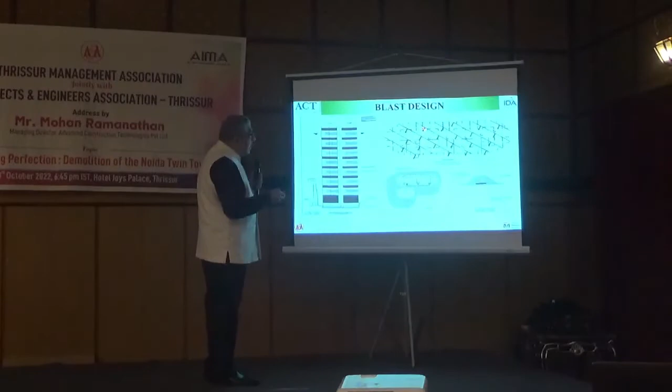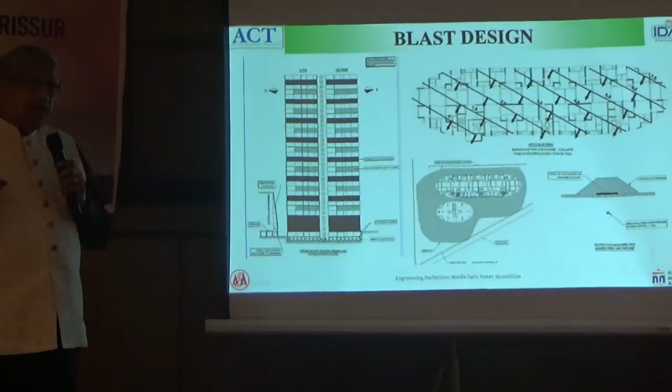I've given you one plan of one floor showing how we are pulling the building in this direction. This is zero, 1 second, 2 seconds, up to 7 seconds in the middle floor. In the top floor, the 9th second will be at the top. Then we have the landing zone. All this put together is calculated, and the dark lines here are the columns being charged. It gives a summary of how we are blasting in each floor in one direction, and in the upper floors it goes to the right at the top. It's complicated, but we had drawings for every floor showing the delays.

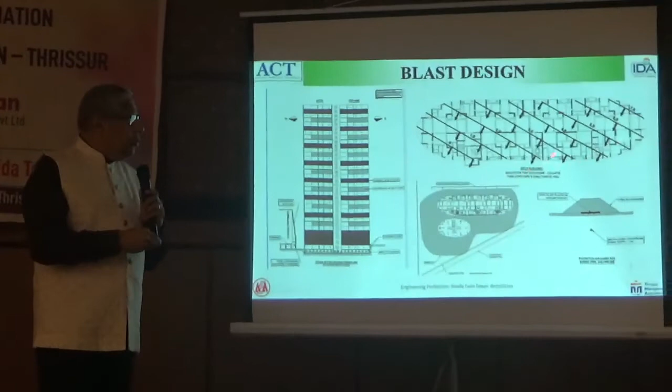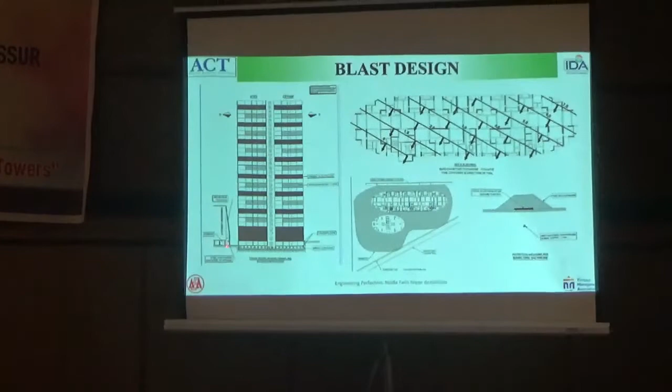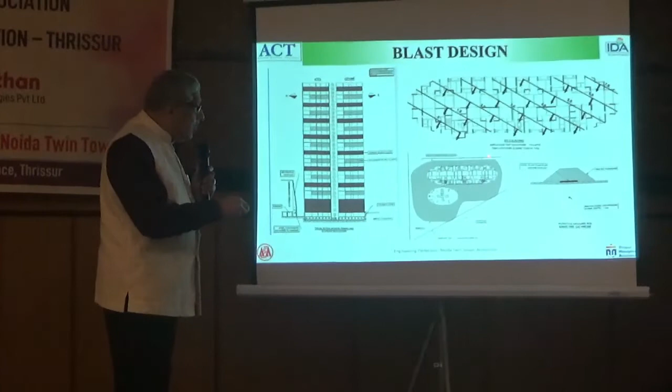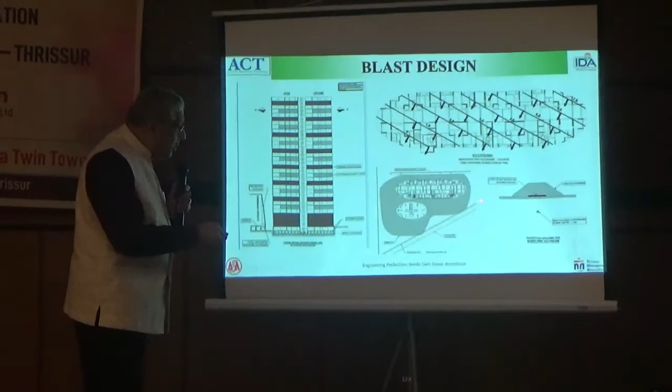And this is the 9-meter building which had to be protected. We had empty seagoing containers stacked up here and also draped. This shows the primary and secondary blasting floors. This shows the expected debris plan. What was planned was the entire debris must come within the boundary of the property. And this here, I know you can't read, is the GAIL pipeline.

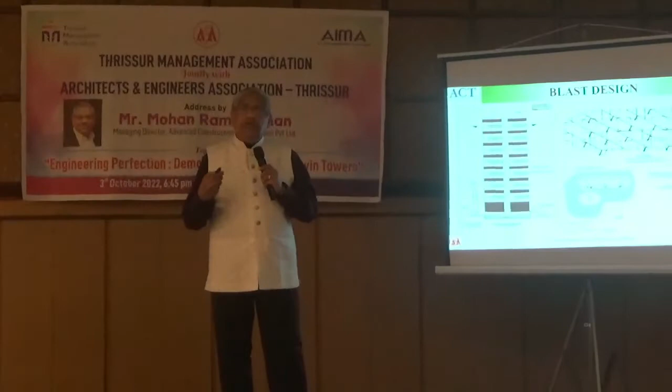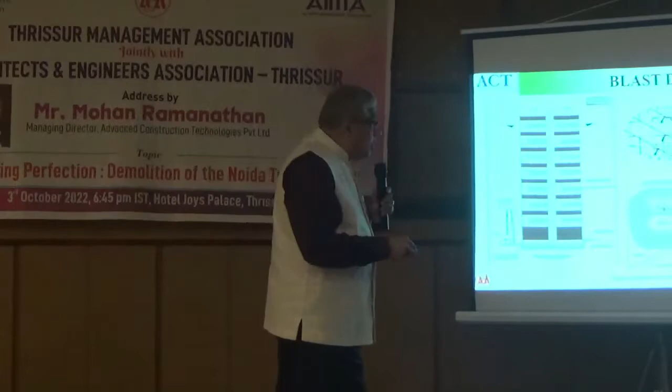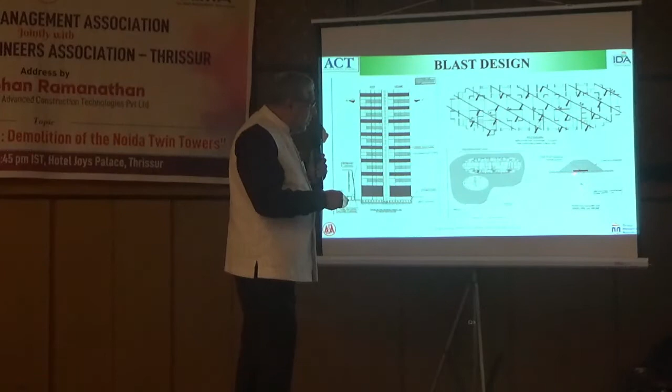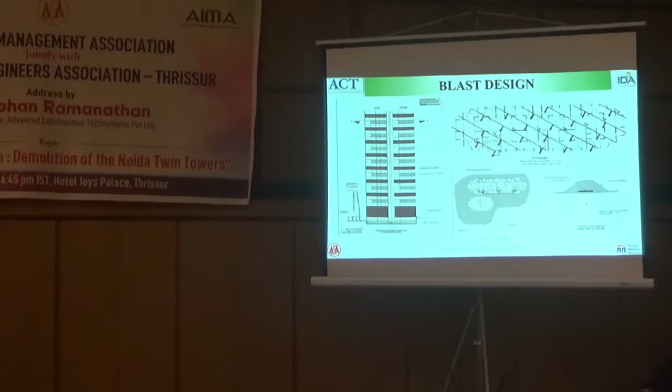And this was the way we protected it. All along we had a steel plate on top of the berm, on top of the pipeline here, and we had earth mounds on top of this to soften the blow if it falls. So every single risk was very thoroughly analyzed. Time is not enough to go through everything.

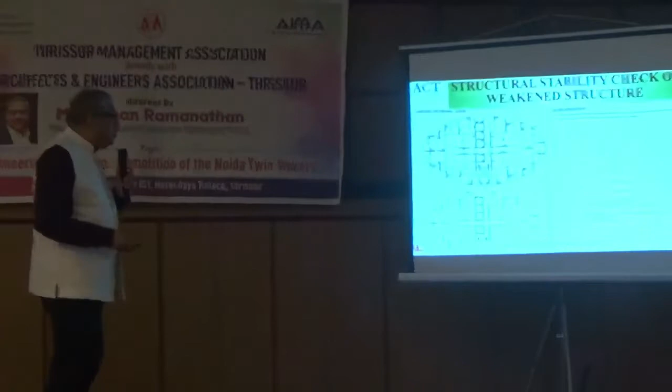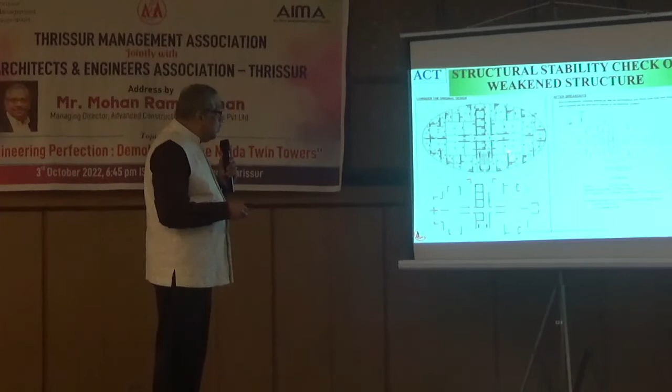And then we have to weaken the structure. We don't want anything to stop the fall when gravity takes over. So here you see which are the columns and which are the shear walls that have to be broken, and to what extent. The red ones show which are the ones to be broken. Suppose there is a shear wall of 4-5 meters, how much we remove.

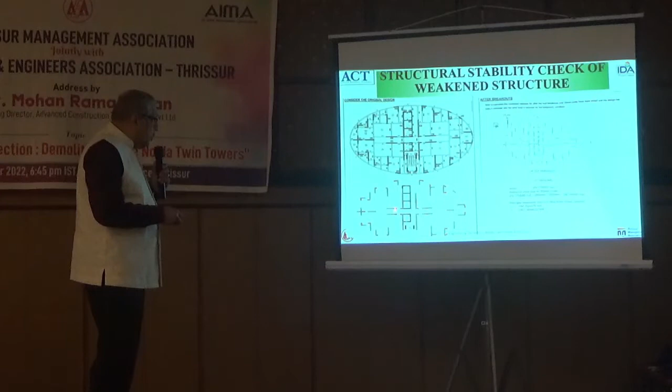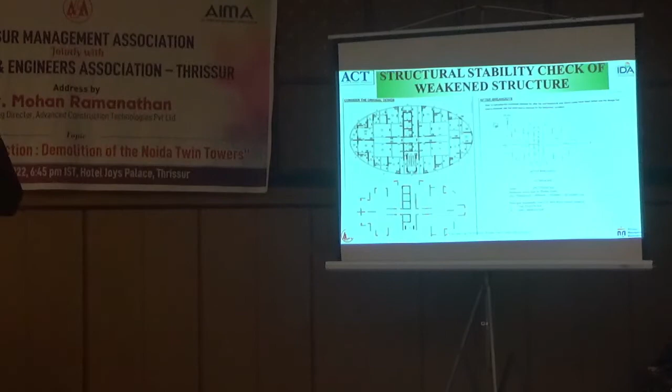And after we do that, there could be an earthquake in Noida, there could be a high wind, and the building is so weak. Almost 300 people work every day in the building, in some parts, on some floor. If the building collapses because we have weakened it, that's a huge risk. A full structural analysis was done on the weakened structure.

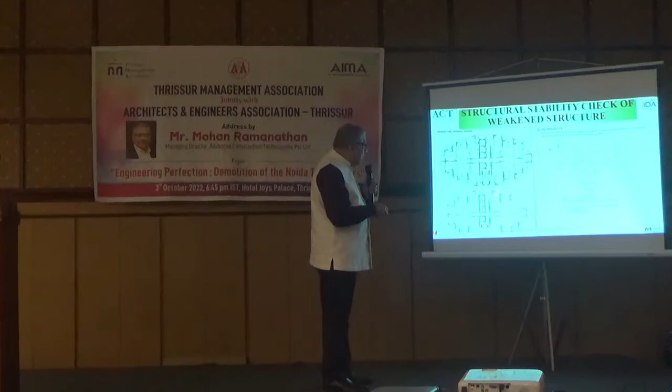So after the breakouts, when I say breakouts, partial demolition of the columns, and I will show you pictures, we had to ensure by structural calculation that the building is safe. But we used a lower factor of safety because there were only a few months. But this also had to be considered.

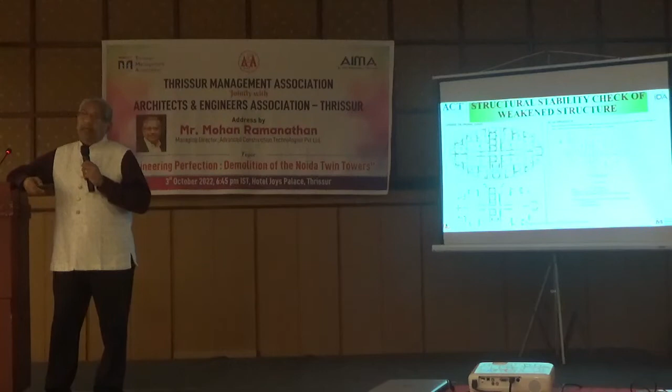If you weaken the structure so much and there is a slight wind, and there was an institute in India who said winds will bring it down. We had anemometers at the top level. We had wind speeds of about 50 meters per second. That was high wind. So we were concerned whether the high wind will shake the building after it is weakened. And if there is an earthquake, God forbid, the whole building will come down and people will die.

So you can imagine the amount of engineering we have to imagine and do to protect ourselves, to protect our name. It may not happen, it's like taking insurance. You wish it never happened, you wish your car will never get damaged, but you still pay for insurance.